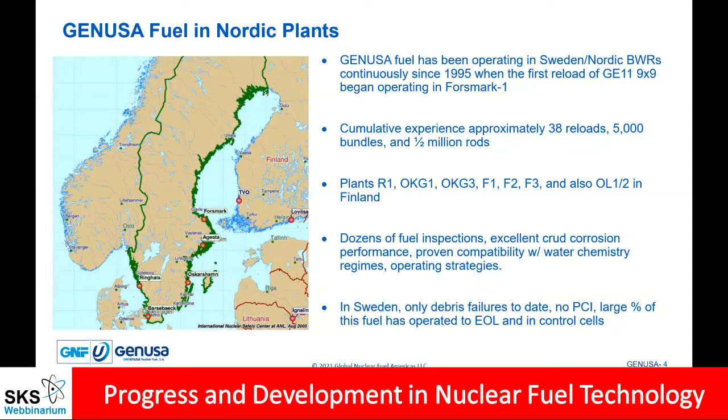And a proven compatibility for the operating regimes and strategies that you have. So, to date, our experience is very good. In Sweden, at any rate, only debris failures to date. So no PCI. So maybe some of what I'm going to talk about today doesn't have relevance, but I'm sure you can appreciate it. A large percentage of this fuel has actually operated to its end of life. Sorry for the acronym there. And in the control cells, where duty sometimes seems to be challenging. So moving on,

this is taking a step way back and looking at 50 years of fleet-wide operating experience. The thrust of technology development in fuel has really been two-pronged. One has obviously been fuel reliability. Now, you guys never had this problem, but primary hydriding in the early 70s was extreme, and there was just lots of leaking fuel. So that was a big problem that had to be overcome.

And then we ran into successive issues with reliability, like pellet clad interaction and then corrosion issues. By the late 80s and very early 90s, we had reduced those obvious reliability problems down to things like manufacturing and debris. It was there too, but it was being masked by some of these other issues.

The thing about reliability is, we've gone through times in the nuclear industry when fuel failures used to be acceptable. Then we had a change of heart, and decided we're going to drive to zero. There was a drive to have zero failures by 2010. Zero is a hard number to achieve, but we can get reasonably close. But at the same time, nuclear is fighting for its right to survive. So the fuel was also being looked to for more economic performance out of the reactor. So what can you do to increase fuel efficiency, to lower the fuel cycle costs?

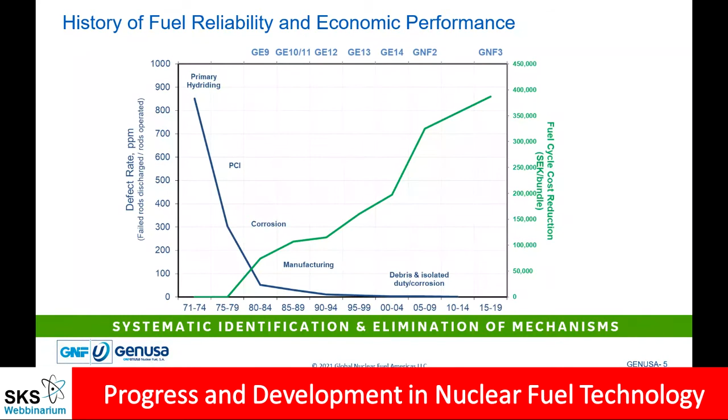So systematic identification and elimination of mechanisms, while packaging that in a form that offers enhanced economic performance, I think has earned nuclear its rightful place in providing carbon-free electricity. It's been no small feat. Now, the real trick is, what are we going to do from here on out to continue this trend? Because I'm sure everybody wants to see that trend continue.

All right, so it does pay to sit back and ask, how long does it take, what did you do when you first noticed a problem, and what's your response? Well, obviously, necessity. There's an expression in English: necessity is the mother of invention, and that's true here as well.

So looking at just the past 20 years, more relevant experience, there's when we had a change in operating strategy in the U.S. It doesn't so much apply in Sweden because you stuck to 1-year operating cycles, but in the U.S. there was a move to go to 2-year operating cycles, which we were able to do. But what that meant was that you wound up controlling fresh fuel.

So it was like the second cycle or third cycle of that 2-year operating strategy where we started to notice channel blade interference. Digging into it a little bit, we found that we developed shadow bow on one side of the channel, and that resulted in differential growth and channel blade interference. All right, so then we had to issue monitoring guidance and then start working on what would be a better, more fundamental solution, which is a material problem.

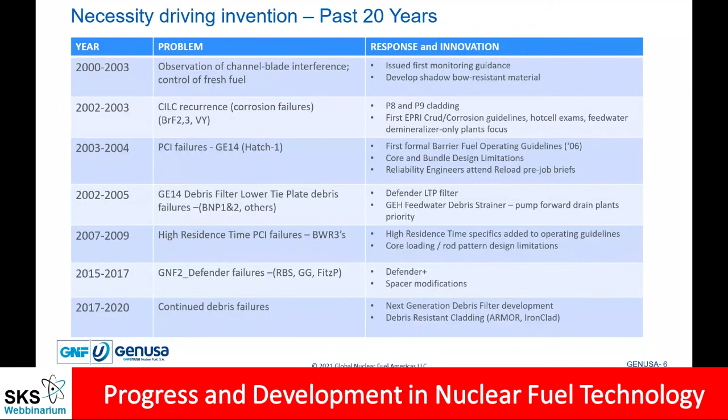And then, of course, 2015, we got some failures even in our Defender lower tie plate, and so we look to improve its performance. And then, even today, we are having some debris failures out in the industry. And so we're looking at even a next generation debris filter and looking for making cladding a little more robust.

So where do we go on this fuel reliability? Well, we continue our defense in depth. There are a number of things I just listed which were pretty effective at controlling debris. We just haven't been able to stamp it out. So we kind of categorize it into four different categories.

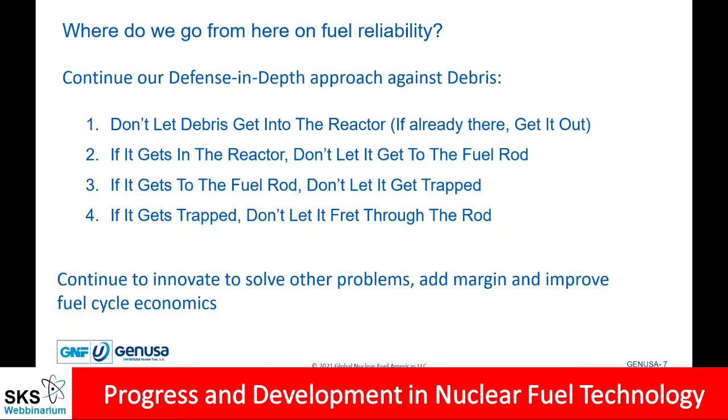One, don't let the debris get into the reactor. So if it's there, get it out. If it does get into the reactor, don't let it get to the fuel rod. That's where debris filters come in. And if it does get to that fuel rod, don't let it get trapped in that spacer next to the fuel rod. And if it does get trapped, don't let it fret through the rod. So those are the kind of four things we have been looking at.

All right, so debris prevention. The industry has done really well. There were some plants that had intrusions of debris from various plant modifications, and then maybe some poor practices, and they have really stepped up to change the way that they handle foreign material and exclude it from the reactor.

We've changed manufacturing practices to make sure that when we ship a fuel assembly, that's all you get is the fuel assembly without any foreign material hiding out in the boxes. Outage services, I mentioned that GEH performs a lot of outage services, and so very high on the list of things they practice is making sure that they have techniques and procedures that minimize the chance for introducing additional debris into the plant.

Some plants have done high efficiency ultrasonic cleaning of the fuel. This is ostensibly done for control of crud, but in fact, we're not too sure that it does a lot for dose, which is what they were going after. But certainly, when you clean the fuel, whatever debris is there tends to come out in that cleaning as well. So while you're kind of shaking exposed fuel, it nonetheless is good for removing debris.

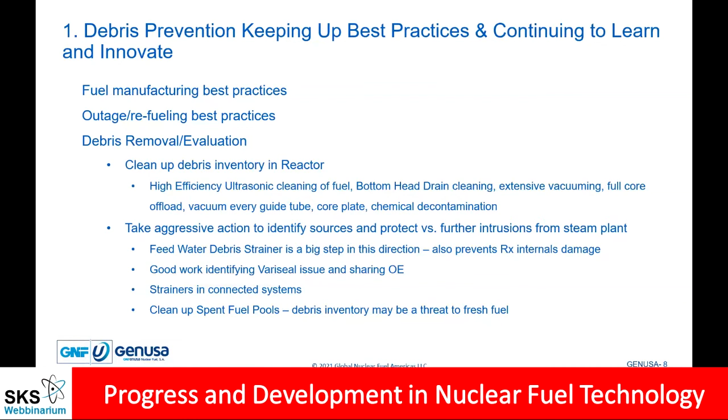Recently, we've had a number of cases, at least in the U.S., where there's a Variseal in a valve, and that has come apart, gets chopped up by the pumps, and becomes fine enough debris to enter the fuel. And we've seen that after the fuel was cleaned, we can identify which seal that came from in the plant. And so cleaning up spent fuel pools to remove legacy debris has also proven an effective means.

And everybody's chasing this. We're not the only ones. Try to eliminate the smallest debris that you can out of there. You can't eliminate everything because then you have no water flow. So you've got to leave some room for water. There's no question about that. And so we're trying to do that.

What we did, in fact, for the next generation filter is we had a contest a number of years back. We said, hey, with additive manufacturing, you can make devices that you couldn't even imagine creating by traditional means. So we had some dozen or 24 types of debris filters designed. They said if you could draw it, you could build it. But you weren't restricted to something that was traditional. So we had some of the designs.

I don't know whether you guys are familiar with M.C. Escher. There's a sculpture called Gravitation, and it's basically a stellated dodecahedron, and it's got all these crazy points on it, and you look at it and you go, only Escher could draw that. We had a debris filter that looked like that.

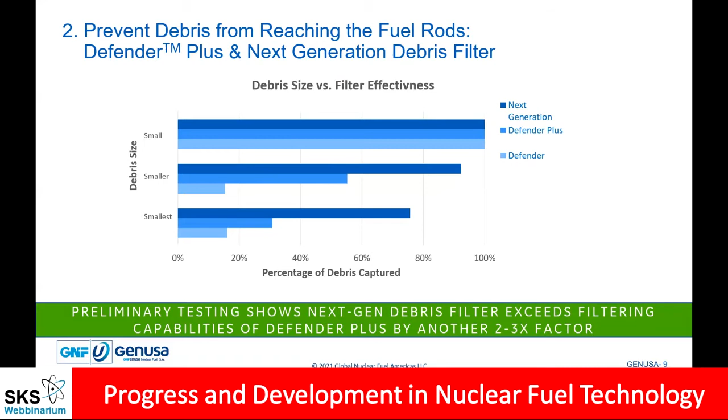We created those with additive manufacturing, and we went head to head with the designs, and we chose the best out of those in terms of effectiveness, and we ran with that for pursuing our next generation debris filter. And it turns out that was a good exercise, because it looks like we're getting 2 to 3 times effectiveness in the smallest of the debris.

So our later spacers, in fact, do not have those V-notches. We took those V-notches, in fact, and put them elsewhere in the Defender filter, because they're so effective at catching debris. So working on the spacer, making sure that there's clearance where there's stops and springs, so that the debris flows on through rather than getting caught.

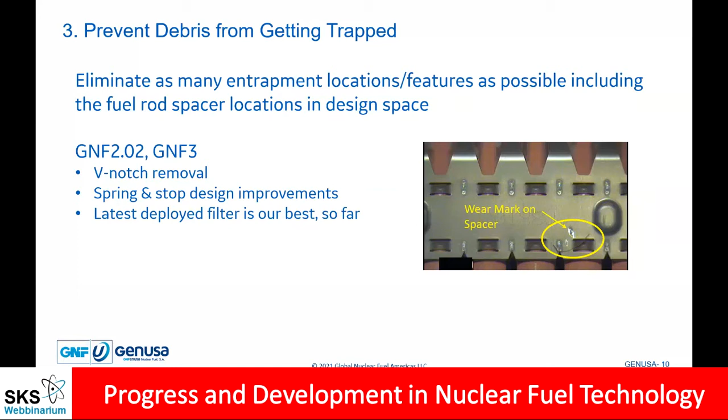So what you can do is you can make a fuel rod, perhaps, that is resistant to that. So we had been working on a coating which was abrasion resistant. And when we put it through its paces of can it withstand the BWR environment, we noticed that its corrosion performance was also extraordinarily good. And so it became more oxidation resistant. So we nicknamed it ARMOR, which is the acronym for abrasion resistant, more oxidation resistant. And so it resists fretting better than the Zirc and the natural Zirc oxide that forms on fuel rods.

It's a very thin layer overlaid on top of our Zircaloy. Today the story is about the spacers. So if you're just looking for abrasion resistance, you really only have to worry about putting it under the spacers, because that's where debris gets caught. However, because of its superior performance in oxidation resistance, we went, well, wait a minute, corrosion resistance is a great thing. We really need to coat the whole rod.

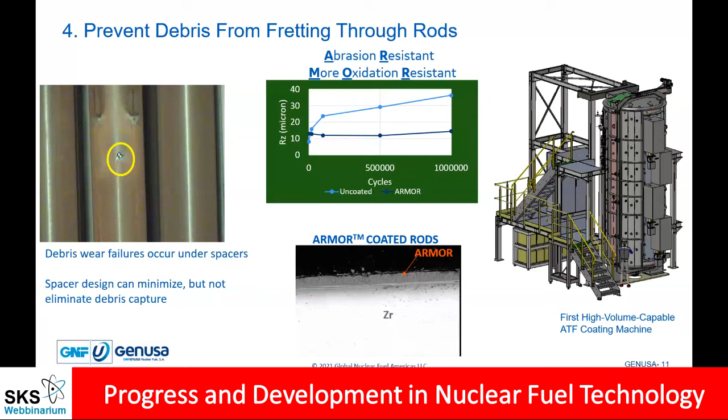And so we've been working on our coating machines to be able to coat the entire fuel rod. And so what you see on the right-hand side is the rendering of what that machine that is going to be installed in Wilmington will look like. There we go. There's a handful of other technologies that we've developed and are ready for harvesting, if you will, to help various reliability issues.

One, of course, is we've been working on additive, and we have the furnaces able to do that. We have NRC approval to use the additive in the fuel pellets, and there's operational experience to extended burn-ups. So when the time is right for including that for PCI resistance, we are able to do so.

We also have Ziron cladding, which has improved corrosion and hydrogen pickup performance. We got approval from NRC more or less recently for that, because we had to, since it was outside the ASTM range. But we have that available as a solution as well. And then I kind of mentioned our NSF, which is a niobium tin iron zirconium alloy for channel interference.

It's got improved fluence and shadow bow resistance versus the Zircaloys, and is essentially equivalent to a Zircaloy channel in terms of dimensions and mechanical performance. And it's proven itself to be quite an effective remedy for this control blade to channel interference due to the channel distortion. We began in 2000 and got approval 15 years later.

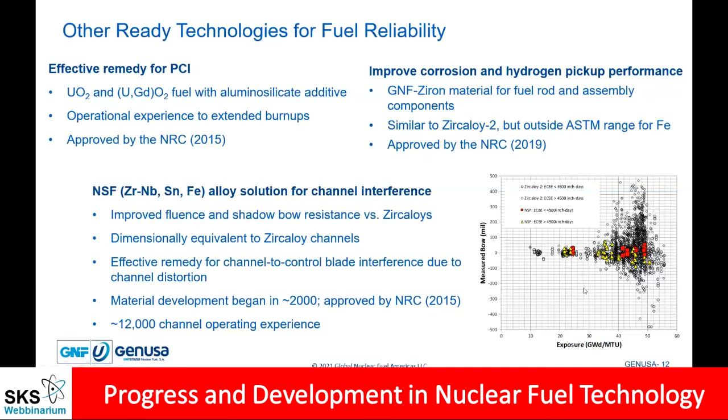All right, so that dealt with reliability, and how we do that is we introduce the technology as we can with the next product line. So as the technology matures and gets approved by the various regulatory authorities, we go ahead and introduce that. I won't bore you too much with the walk of our product lines from the early days, but since the 90s, we've been on our 10x10 fuel generation, and really that has been a question of being able to increase fuel efficiency, usually through linear heat generation rate improvements, and also, for us, adding mass.

The early 90s saw quite a number of power uprates, and there was a demand that there simply be more fuel in the fuel assembly. And so we did that by going to GNF2. GNF2 put several kilograms more of actual heavy metal into the fuel assembly. We improved the critical power performance, and we also improved its linear heat generation rate simultaneously. And of course, that has the net effect of increasing the fuel cycle benefits that you get from operating that fuel with lower batch fractions.

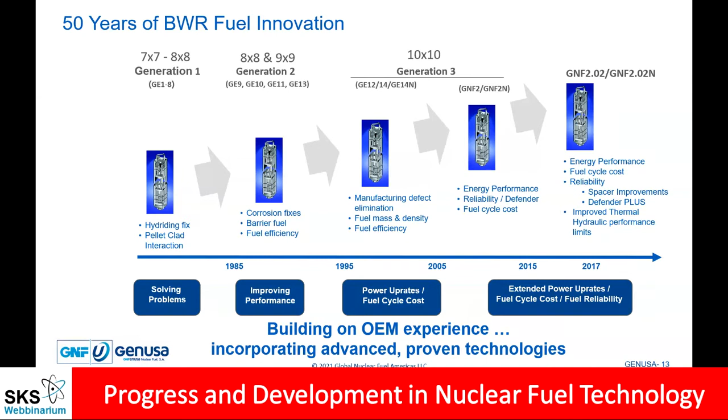Going to GNF 2.02 was mainly about getting some additional reliability and features in there, including the spacer improvements and the Defender Plus. And we also took a look at the software or technique of how you manage critical power, and so we offered an upgrade to that treatment. And so that's what we've got in GNF, what we call 2.02, available worldwide and also here in the Nordics. And we have the appendage N when we are able to offer that in the Nordic style.

All right, those are all more or less incremental improvements. And there's a story here about ATF. ATF is accident tolerant fuel. And to a large degree, when this started, DOE had said, you know, what can we do to help the industry? And we came up with some great ideas. All three fuel vendors came to them with some interesting ideas they wanted to pursue. And the kickoff meeting for that program, which was in the Advanced Fuel Cycle Initiative, happened on March 15th, 2011. 4 days after the Great Tohoku earthquake and tsunami.

So that was a very somber day for the industry, and what had started out being an interest in really changing the way fuel was conceived of in the industry, it became, what can we do to prevent consequences of an accident? And so there were a number of years spent chasing exactly what that would look like. And then the utilities were a little bit lukewarm as to whether that would really manifest itself in something that would be useful to them, where they could probably get the same types of accident response improvements in other ways.

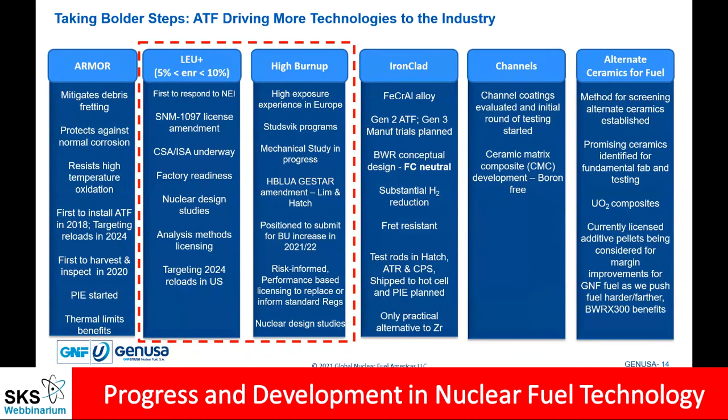I would be crazy if I didn't say kudos to the Department of Energy. This is work done under a program, and the information is given here. My views don't reflect those of the U.S. DOE, but I thank them anyway. All right.

I'll skip over this very briefly, but you'll have this in the package when you get it. When I say LEU+ affects the entire fuel cycle, I mean everything, except for maybe the mining. Everything from enrichment and transport of the raw material, how you get it to our factory, how we get it around the world in shipping containers, the basis of our criticality methods for the fuel factory, the waste streams in the fuel factory and the sizing of componentry, all of that needs to change.

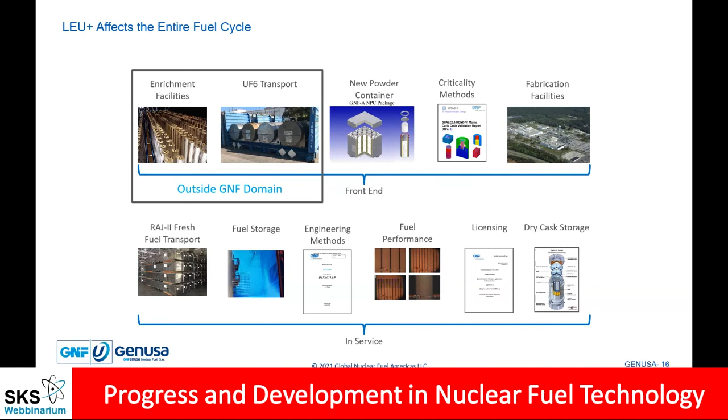In addition to the stuff in the reactor, which is what I talked about, you also have to worry about the fresh fuel shipping container and the fuel storage at the site, the methods and fuel performance, as well as when you discharge. There are assumptions that have been made about what's been discharged, and when you go to high enrichment and high burnup, all of those assumptions change. So while it sounds easy enough to say we're going to go to high burnup and high enrichment, all of these things need to be changed all at once before you can load the first one.

And then I mentioned risk-informed and performance-based. This is something that the U.S. NRC has been talking about for a while. Right now, what we're hearing from them is that they really are trying to innovate. You guys don't have to put up with this necessarily. We've been very, very prescriptive in the U.S. We have these regulatory guides that if you don't adhere to them, the burden of proof is just really large to be able to overcome that.

And NRC has decided, under their instructions, that they really need to take a look at: is this truly important to go chase? Is this really a risk? And is it based in actual performance, or am I holding you to just a process? In this way, NRC is maybe moving a little more towards how SSM has always traditionally been, where they've put some thought into whether it's really an issue that's pertinent to safety or not.

And so we're exploring this with them. NRC is happy to be working with us, and we're happy to have that conversation. Us and a couple of utilities in the U.S. are spearheading what this means for fuel licensing. So we'll keep you updated on how that goes. I hold out great hope that this can yield benefits for everybody.

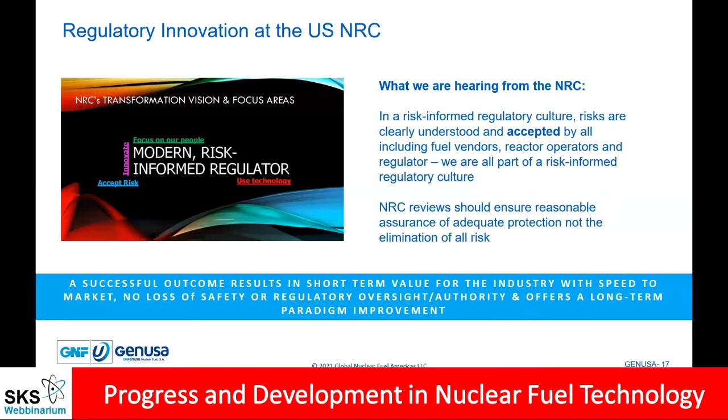All right, and finally, when we take a look at all of those things that we've been developing, we imagine our product strategy to be one that continues to harvest the technology as it comes along. In the U.S. and elsewhere, GNF3 is going to be deployed. That's been through its U.S. licensing. It was meant to take yet another step in improved fuel cycle economy by adding additional length of rod for LHGR and additional mass in the bundle, so that the energy performance of that bundle is greater.

And to do so, we've harvested some of those techniques we derived, put them into the bundle, and made our justifications. And so the entire envelope is one of increased efficiency, higher mass, improved critical power performance through hardware, and a little bit in how we did our correlation for critical power. So we were able to improve the way we did our software there, and I think it's shown great benefit.

When we get to later in the 2020s, some of that ATF technology being derived will be put into a fuel assembly called GNF4. We're not completely certain which ones we're going to put in there, but obviously we're going for yet increased fuel reliability, and likely harvesting the things we do to be able to go to high burnup as well as high enrichment, and optimize it a little better. And of course, with that, increased efficiency, lower fuel cycle costs, as always, and some margin for longer cycles.

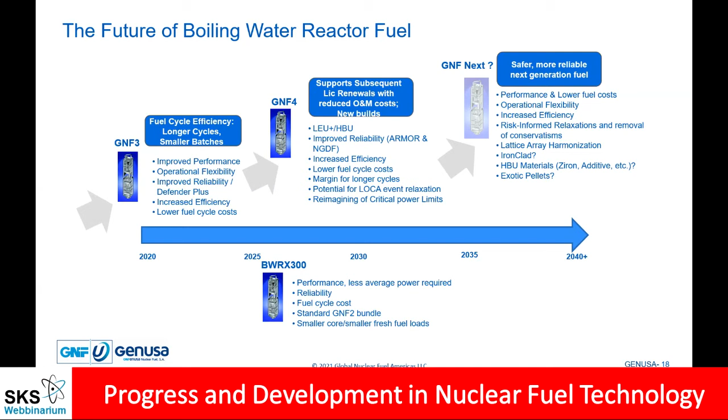So, anyway, with that, I'm done. I'm sorry I took so much time, Uffe. Okay, thank you very much, Russell. There's an echo here. But okay, so we have some time for some short questions.

We have some in the chat, and let me bring them up. First one is regarding debris size. You talked about small, smaller, and smallest debris. What do you mean by that? Which form and how many?

Okay, so the debris size is difficult to characterize because there is both a diameter and a length involved. And so what we're talking about is fractions of a millimeter in diameter and, I don't know, somewhere between 4 and 10 millimeters in length, maybe even 3. So something like that is the smallest debris.